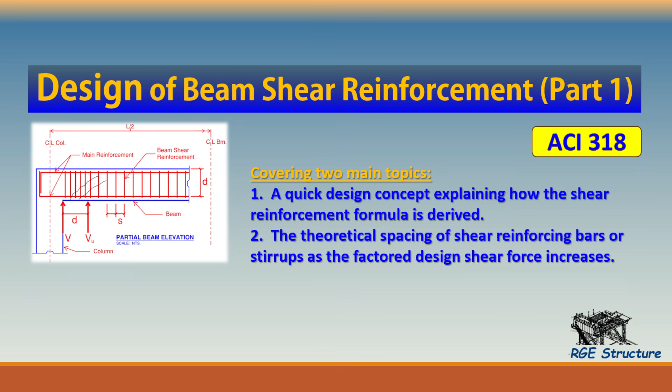In today's video, we will walk through another sample problem regarding the design of beam shear reinforcement, part 1. In this example, we are covering two main topics. The first one is a quick design concept explaining how the shear reinforcement formula is derived. The second one is the theoretical spacing of shear reinforcing bars or stirrups as the factored design shear force increases. So let's dive into the problem, and here it is.

The beam shown in the figure below was selected using a yield strength of 60,000 psi and a concrete strength of 3,000 psi using normal weight concrete. We are required to determine the theoretical spacing of the stirrups using number 3 bars for each of the following shears. We are given A to D.

From A, we have a maximum shear force of 12,000 pounds up to 150,000 pounds. We have the cross section of the beam here. This is the profile of the number 3 ties, and we have an effective depth of 24 inches. The width of the beam is 14 inches.

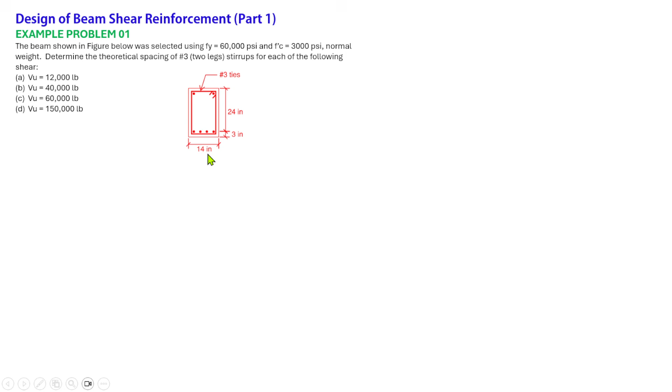First of all, we need to discuss how the formula of the spacing is derived. We have the elevation, the representation of the diagonal cracks, and the vertical representation of the stirrups. We have the spacing of the stirrups, and we have the distance d. If this is 45 degrees, as per the ACI code, then this is also d.

So the nominal shear strength of the stirrups is Vs equal to Av times fy times n. Av is the area of the ties crossing the beam section, times fy, and n is the number of stirrups crossing the beam section within the distance d. That's why the number of stirrups within the distance d is n equal to d over s, if we calculate the number of stirrups crossing within the distance d.

The next one is one of the provisions of the ACI code, equation 22.5.10.1, that the maximum shear force should be less than or equal to the design nominal shear strength, which is composed of the design shear strength of concrete plus the design strength of reinforcing steel. Phi here is equal to 0.75.

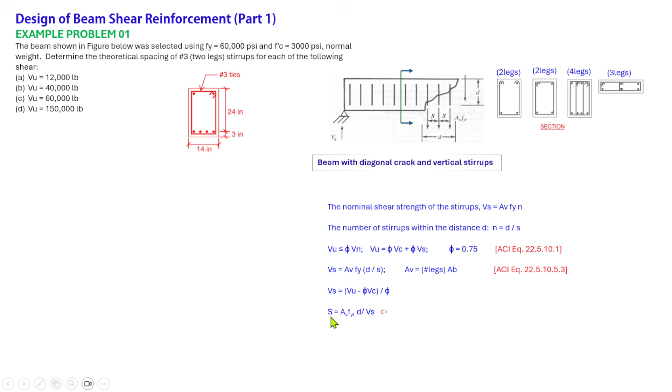So the spacing of the stirrups is equal to Av times fy times d over Vs. So if we determine the value of Vs, then we can calculate the spacing of the ties. So that is how the spacing of ties is calculated, derived.

And now this is the representation of the general arrangement of the stirrups with beam shear reinforcement. We have the spacing of stirrups actually, but in our problem we are given the Vu at the distance d from the face of the support. So we are calculating the spacing of these ties within the distance d. So this is only the representation of how the ties and the main reinforcement are arranged in its general elevation.

So let's get started with the solution. So from A, we are given 12,000 pounds. Using normal weight concrete, lambda is considered as 1. So the design shear strength of concrete is equal to phi times 2 times lambda times the square root of fc prime times the cross-sectional area of the beam.

So we have 0.75 times 2 times 1 times the square root of 3,000, strength of concrete, times the cross-sectional area, 14 times 24, is equal to 27,605 pounds. And that is according to the ACI table 22.5.5.1. You will find the formula in that table, this one here.

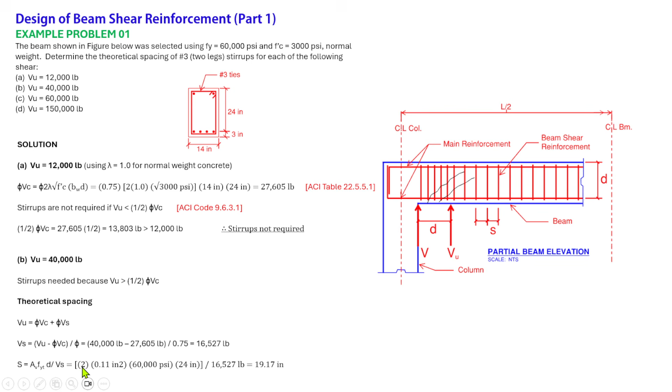So take note, guys, that the 2 here represents the 2 legs of the stirrup in our example. If we are using 3 legs, then you have to put here 3. So 2 times 0.11, this is the area of the ties, using number 3 bars, times 60,000 psi times 24 inches. This is the depth of the beam, all over the value of Vs, which is 16,527, and that would give us the actual spacing of stirrups of 19.17 inches, which is the required spacing of the ties within the distance d from the face of the support.

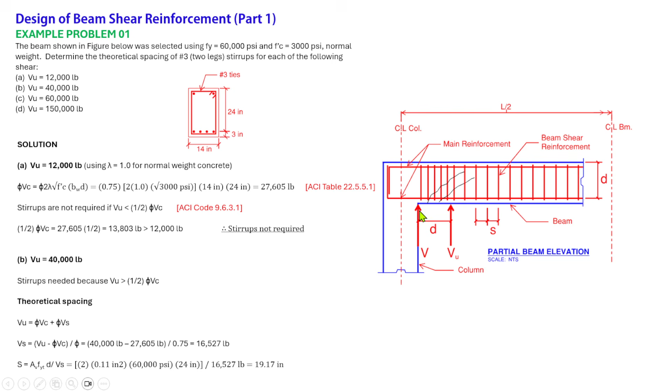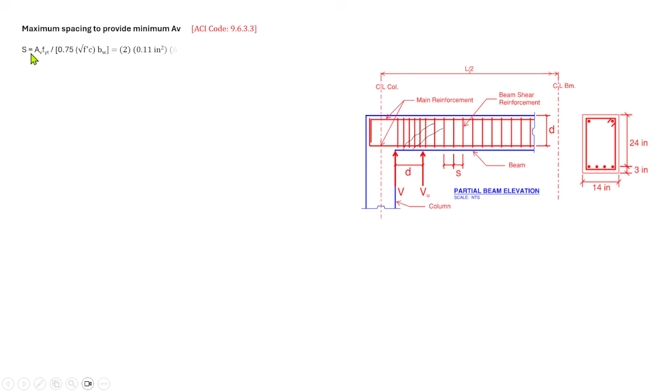So the next one is to find the maximum spacing to provide minimum area according to the ACI code, that is 9.6.3.3. So the spacing from this formula is equal to Av times the yield strength over 0.75 times the square root of the strength of the concrete times the width of the beam. So that is equal to 2 times 0.11 times 60,000 psi over 0.75 times the square root of 3,000 times 14 inches.

That would give us 22.95. So the other provision is spacing equal to Av times fy over 50 times the width of the beam, which is equal to 2 times 0.11 times 60,000 psi over 50 times 14 inches, equal to 18.86. So these are the maximum spacings of the ties according to these code requirements or provisions.

So the next one is to compute the maximum spacing of the ties, d over 2 less than or equal to 24 inches. So we have to calculate this if Vs is less than or equal to 4 times the square root of f'c times the cross-sectional area of the beam according to this code here. So Vs is equal to 16,527 pounds, less than 4 times the square root of 3,000 times 14 inches times 24. That would give us 73,614 pounds.

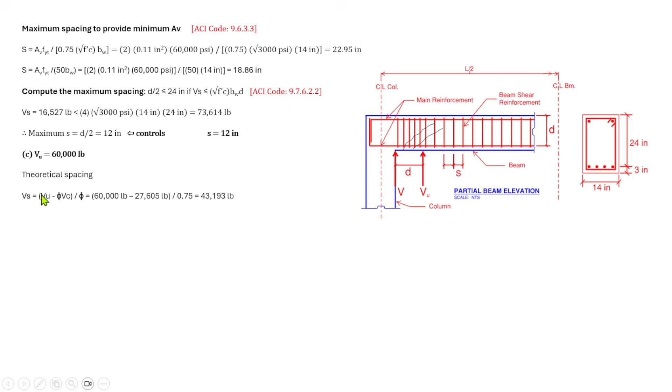So the next one is the shear force. We are given 60,000 pounds and we are required to determine the spacing of the stirrups. For the theoretical spacing of stirrups, you need to calculate first Vs. So Vs is equal to Vu minus the shear strength of the concrete, all over phi. That is 60,000 pounds minus 27,605 pounds over 0.75, which is equal to 43,193 pounds. So that is the value of the shear reinforcement of the steel.

So the spacing is equal to Av fy times d over Vs. So if we multiply 2 times 0.11, the area of the ties, times 60,000 psi times 24 inches over 43,193 pounds, that would give us 7.33 inches. So this spacing, guys, is the required spacing from the face of the support to the distance d. So that is the spacing, 7.33.

The next one is to determine the maximum spacing to provide minimum Av according to this code here, 9.6.3.3. So according to this formula, we have Av times fy over 0.75 square root of f'c times b, the width of the beam. That would give us 2 times 0.11 times 60,000 psi over 0.75 times the square root of 3,000 psi times the width of the beam, 14 inches, which is equal to 22.95 inches.

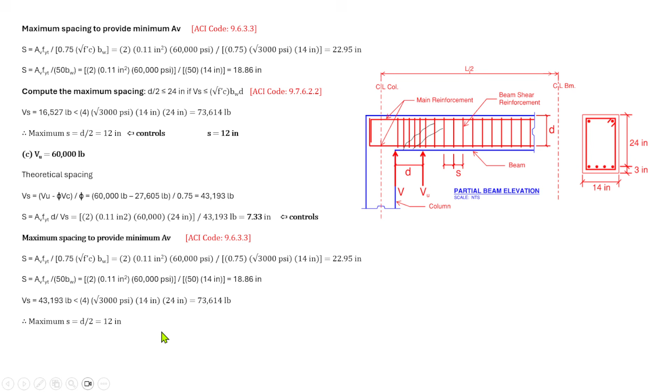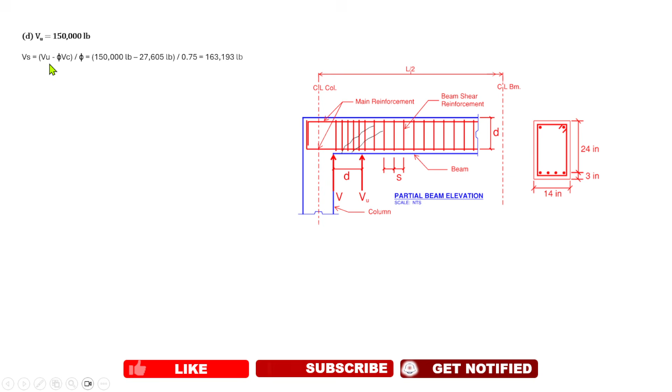So the next one, the last one, is the maximum. We are given the maximum design shear force of 150,000 pounds. So here Vs is equal to Vu minus the design shear strength of concrete over phi, that is equal to 150,000 pounds minus 27,605 pounds divided by 0.75. That would give us 163,193 pounds.

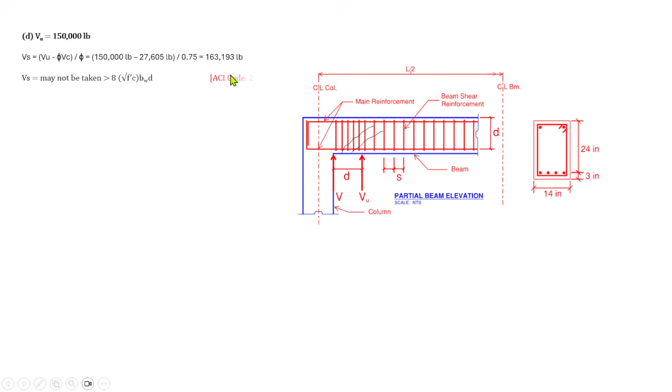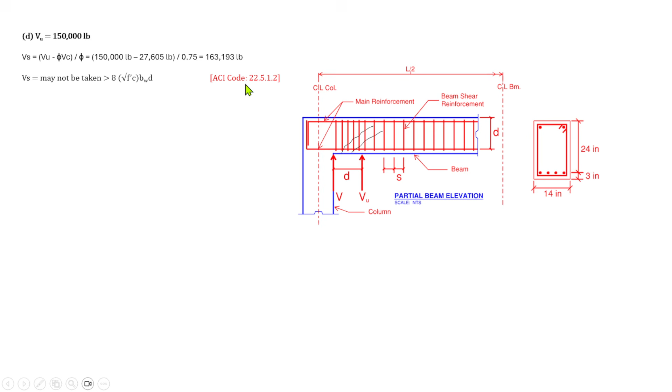So by inspection, Vs is greater than 8 times the square root of f'c times the cross-sectional area of the beam according to this code, 22.5.1.2. So 163 is greater than 8 times square root of 3,000 psi times 14 inches times 24, which is 147,228 pounds. So therefore the beam is insufficient, so we need to increase the size of the beam, or maybe increase the strength of the concrete.